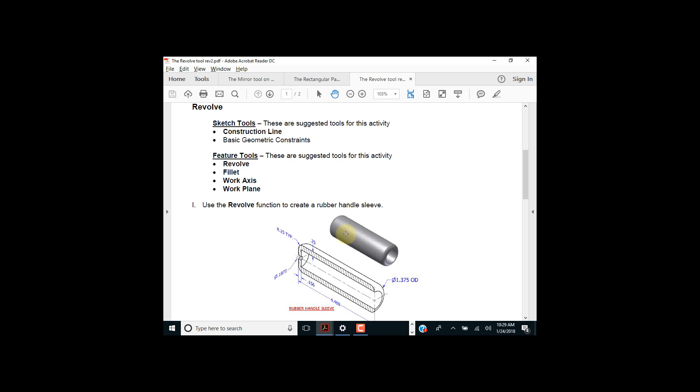We're going to make a rubber handle sleeve that might go on a metal cylinder in here. Here's a little picture of it, and here is an isometric dimensioned drawing of it.

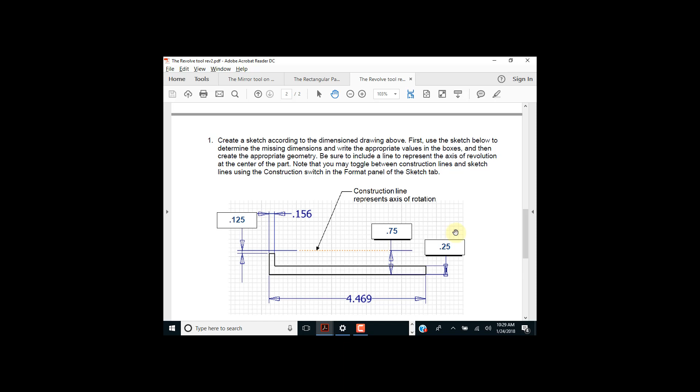We're helped a little more when we're shown the cross-sectional area, or the sketch if you will, that gets revolved around the axis of rotation, the construction line you see there. And we end up with this here.

So the place to start would be with the sketch. Let's do that.

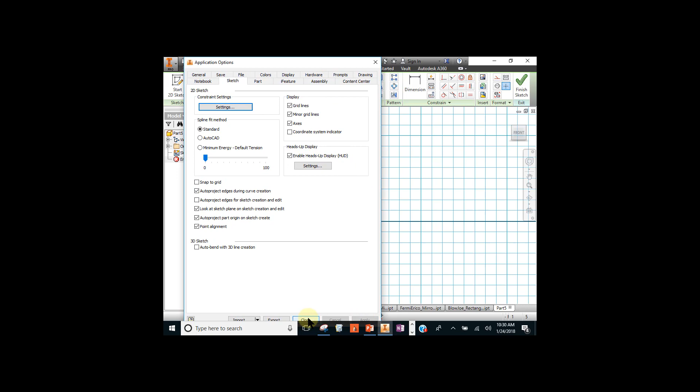I'm going to start on the XY plane here, and I'm going to be going back and forth here. Let me turn on my grid lines. And there we go, just for a little difference there.

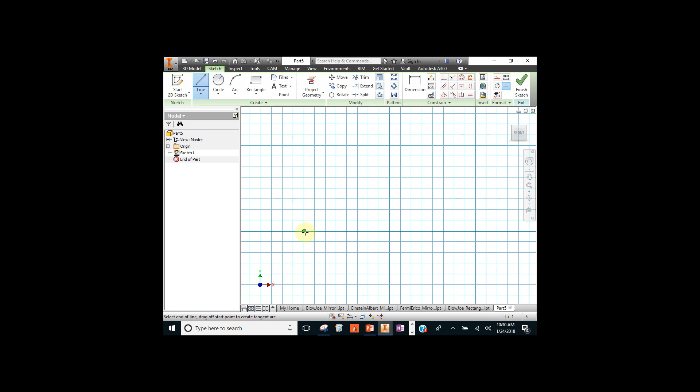Okay, so what are we doing here? We are going to make that hockey stick on its side, and let's just draw it freeform, and then we can dimension it later. I like to draw starting at the origin, and so that's about...

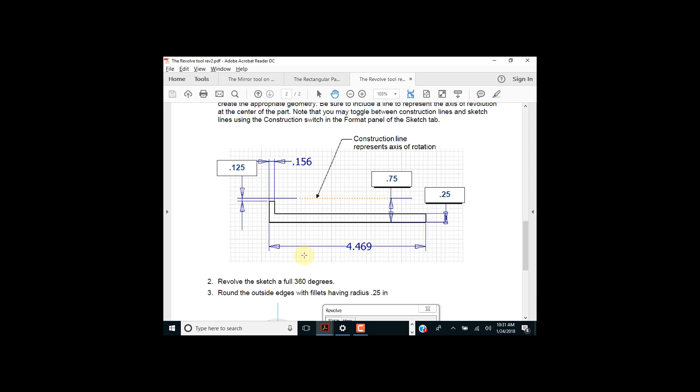We got to do some arithmetic here, a lot of arithmetic. So let's just go ahead and draw that thing, letting Inventor do the work to make sure everything's perpendicular. I'm going to come back here like this, and up like that, and over.

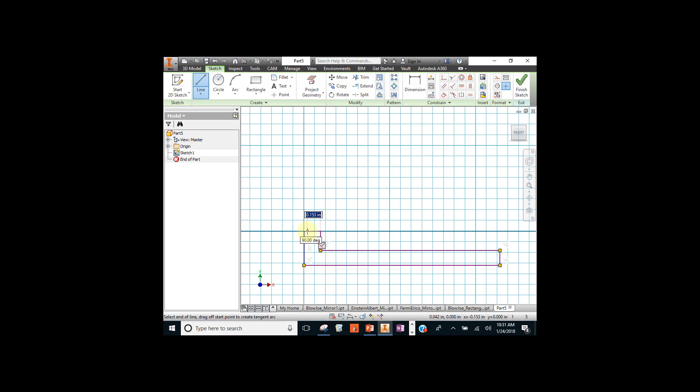Now let's dimension what we can dimension. If you recall, when you draw freeform, it seems like dimensioning the little things first to make sure they don't get completely obliterated by bigger length dimensioning is a good idea.

So let's do the 0.156. That is, say, between here and here, 0.156. Okay, so far so good. Looks like this is 0.25. Uh-oh. No, okay, yeah. So that's that.

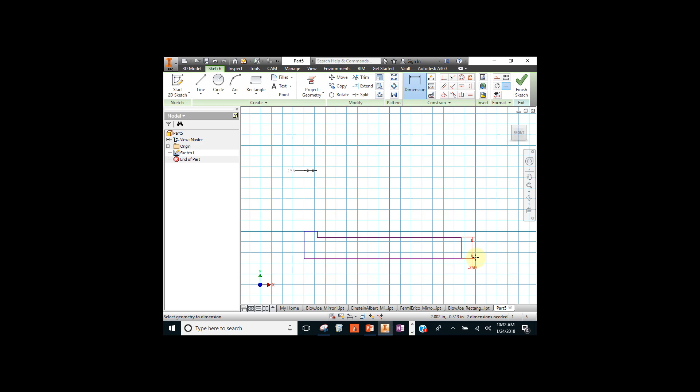I don't think we'll get in too much trouble if we dimension the big feature. It's much bigger, 4.469. Let's give it a shot. 4.469. Okay.

So we're there. Now we have to do some arithmetic, I think. What numbers haven't we used? Well, we haven't used this 0.75. We got to be careful on that one. We're going to have to draw our construction line here. There it is.

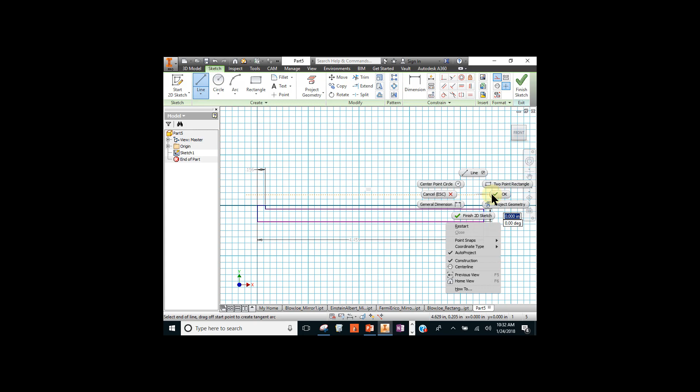This 0.75 is the distance from the outer part of the what's going to eventually be the handle and the axis of rotation of that construction line. So let's go ahead and dimension that. From our construction line here to here, what I think we're being told is that is 0.75.

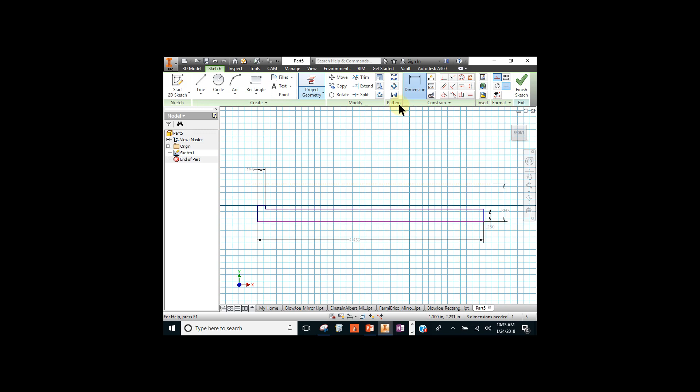We've used everything except this 0.125. So let's go ahead and do that. From here to here is 0.125.

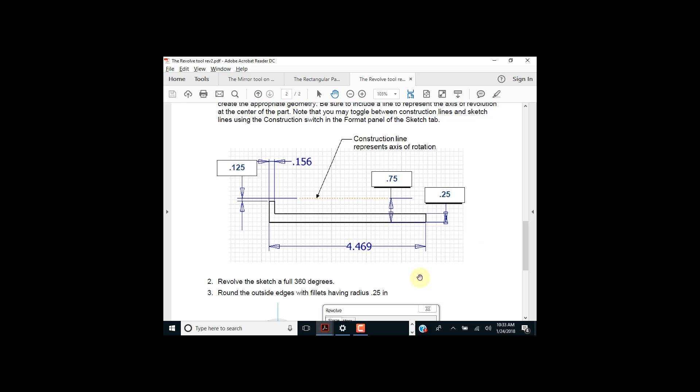Actually, maybe we don't need to do the arithmetic. Still two dimensions needed, but I think that's okay. It looks the same. Let's do it. Finish sketch.

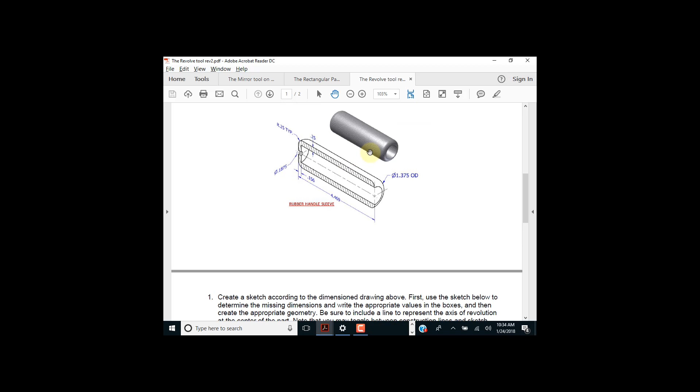And remember what we're going after is this. So let's just think it's obvious what to do now. Take the revolve tool, and then for the axis we choose that, and we get that.

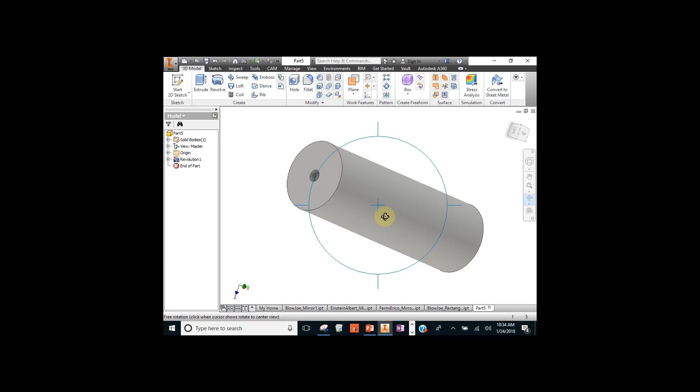What you'll notice is that when you had that little jog upward on the hockey stick, the part where it hits the puck, you get something like that, whereas if you don't have one, you'll get something like that. Okay, that doesn't really look like what it's supposed to yet.

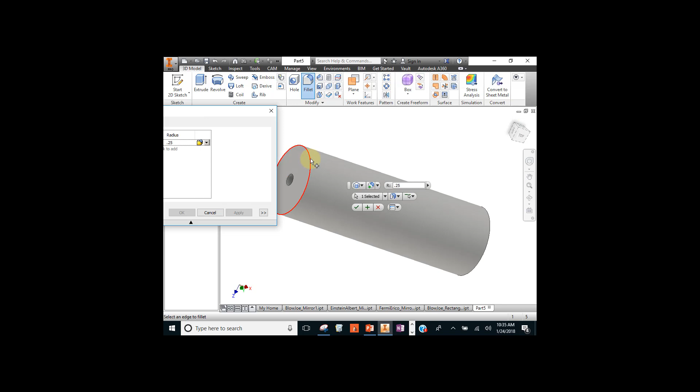But they tell us that around the outside edges with fillets of radius 0.25 inches. So that would be, I believe, on this side. So fillet 0.25 right there, apply. So we have that.

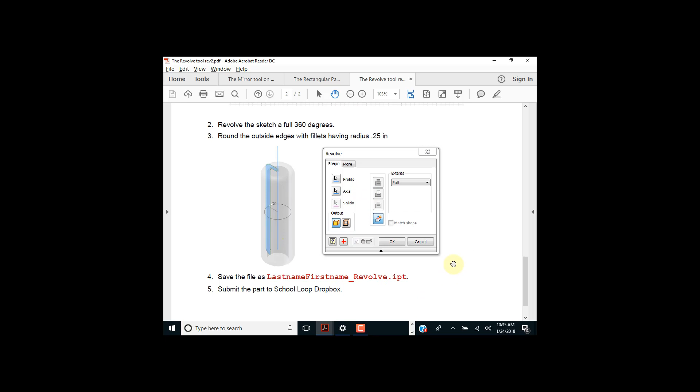What about the other side? Do we need to fillet anything there? That looks like it's filleted also. Oh, 1.375 OD, so...

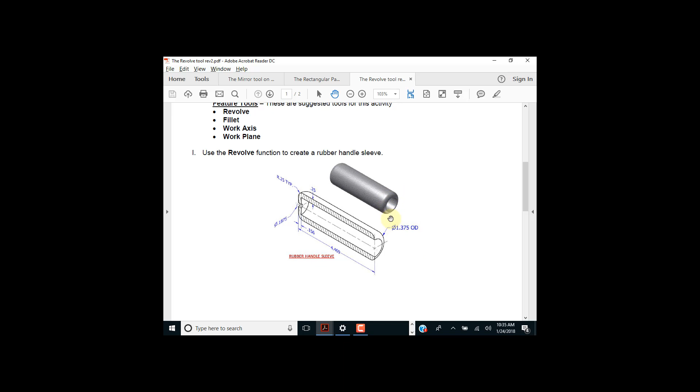I think we do need to take care of the... let's do a quarter inch fillet here as well and see what happens. Is that right? We're going to go with that for now.

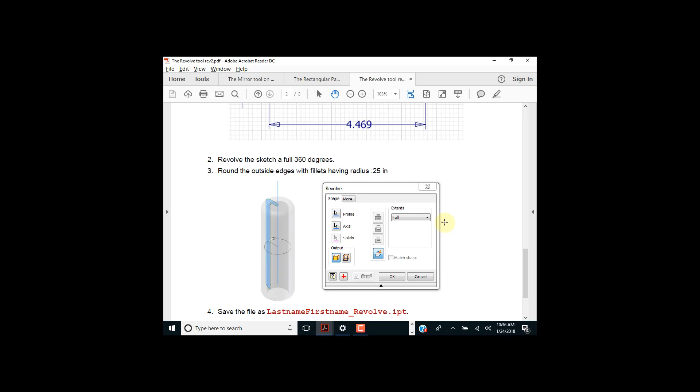So getting back to that, when it says typical, that means that all corners that could reasonably take the 0.25 radius fillet would get it, so we'll put it on both sides.

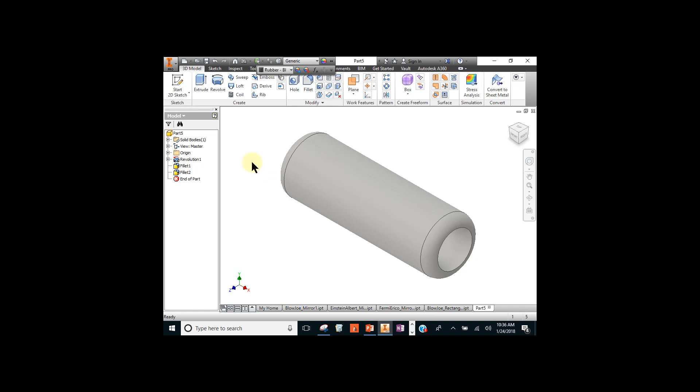Let's give it a color. Okay, my screen is squished. And if we call it, I believe there's a color for black rubber. So then it looks kind of like what a handle would really look like.

Let's go ahead and name it appropriately. Let's name it last name, first name, underscore, and your stuff in there. Again, this should go in the T9 folder. Revolve. Yeah, just like it says.

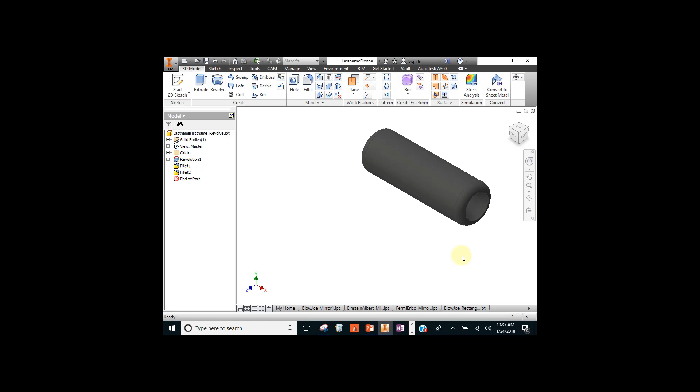All right, so take out the side, the little vertical area there, so I can see your name and all how you made it. Physical update, and we're going to find that this thing has a volume of 4.375 inches.

So go to the Snipping Tool, new, just get the whole thing, and we've got everything we need, and go ahead and upload that to School Loop Dropbox.